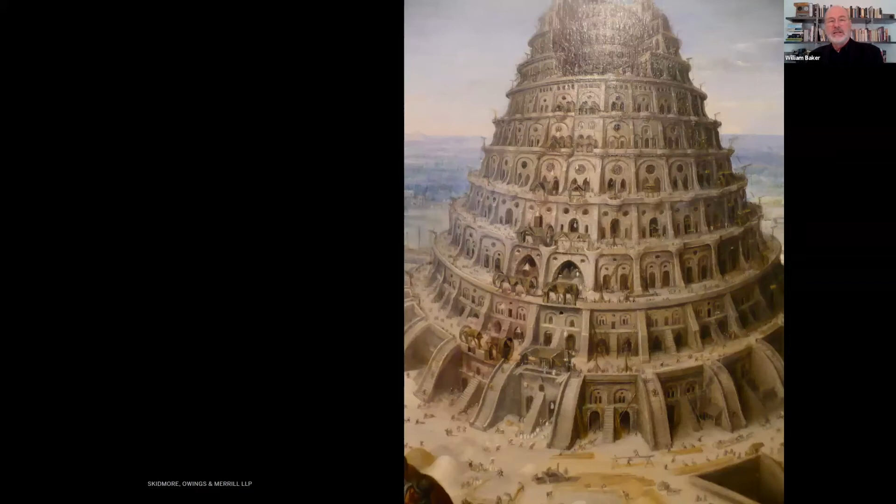Now, when you talk about tall buildings, they're definitely part of our culture. There's always been the desire to go high. If you're in the hills, you want to climb the mountain, you want to go see what's on top. It's part of our culture going back to the Tower of Babel. It's central to who we are.

We have this desire also not only to go high, but to stand over the abyss. These are glass boxes that hang off the edge of the Willis Tower, used to be called the Sears Tower, where you're a good 300 meters above the pavement.

And skyscrapers - there's some debate about what is the world's first skyscraper, but for the moment, let me use the Home Insurance Building as an example. What makes it a skyscraper? There's two fundamental things, and these also apply to the Burj Khalifa.

This was the first steel frame building - the structural system and the elevators, the vertical transportation, as you call them, the lifts. On the Home Insurance Building, it was a steel skeletal frame. And for the lifts, Elisha Otis developed the safety elevator where you could cut the cables and it made it safe enough that people were willing to have it as the primary means of getting up and down the building.

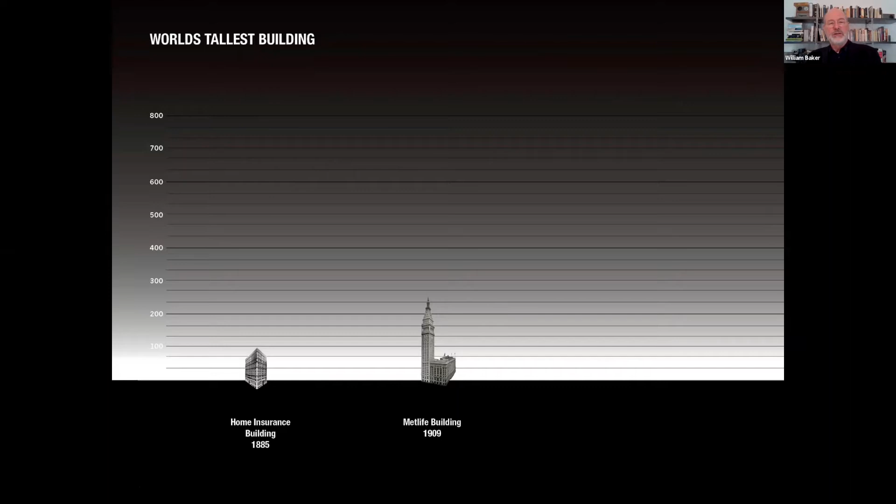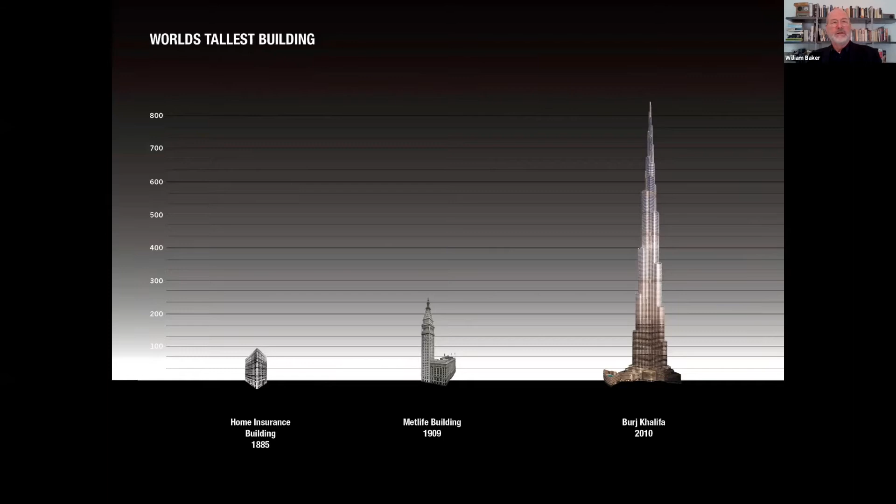I have to say that structure and vertical transportation are still the key components of tall buildings. And the change in tall buildings went fairly rapidly from the Home Insurance Building to the MetLife building in New York, and until we get to the Burj Khalifa, basically 100 years after the MetLife building. So there's been quite a run up in the height.

Though there was a bigger change from the late 19th century to about 100 years ago, the 1920s and 30s, principally in New York, there was a great run up in height, and then the increase in the height of the world's tallest building was somewhat incremental for quite a few years.

And there's all these debates about whether or not you count the thing on the top. Is it part of the architecture or is it an antenna? Depending on how the buildings are designed, sometimes they're counted, sometimes they're not. But you can see it was a fairly steady range for the world's tallest building until you get to the Burj Khalifa, where the change in height was more than a 60% increase.

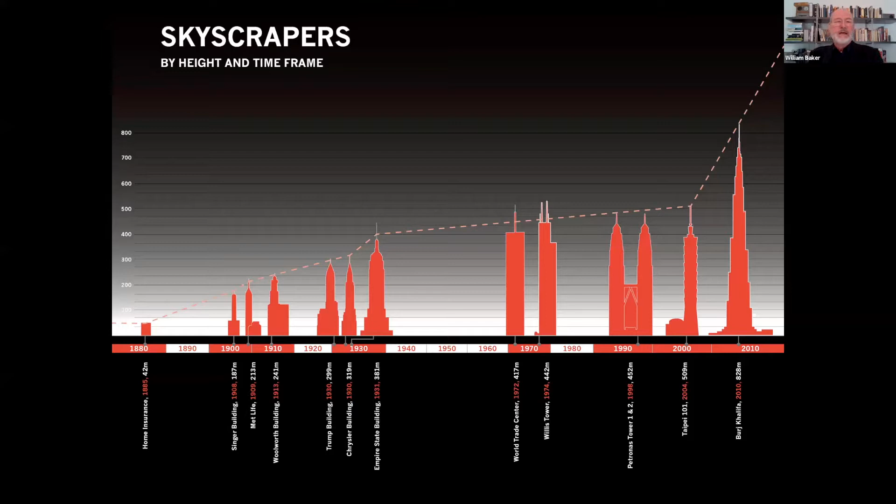And since it's a student presentation, I want to bring three technical issues to you. One is first a concept of a tall building - it's a giant beam coming out of the ground. Conceptually, this is very, very important.

Because if you think of it as thousands of elements, like these little columns and spandrel beams and floor beams, it's too complex. Our brains are not able to deal with that information, and you cannot do the design. So, quite frankly, I do most of my preliminary designs on paper with an HP calculator, a pencil and an eraser.

And you can design the world's tallest building with just those tools. In the end, you're going to put it in the computer to verify things and see if you missed something or get additional insights. But the fundamental concepts should be in your head.

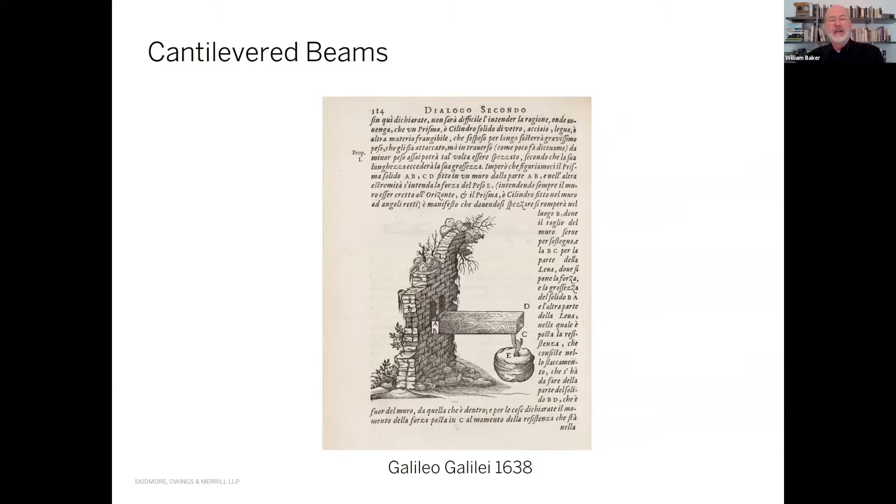And let's talk about beams. Let's go back to the first structural theorist, which is Galileo. I consider him the first modern structural theorist. In his dialogues of 1638, he talks about the cantilever beam, and he gets it not quite right - he didn't figure out the neutral axis, but he got enough that he got the concepts right. So here we have a cantilever beam coming out of this remnant of a masonry wall.

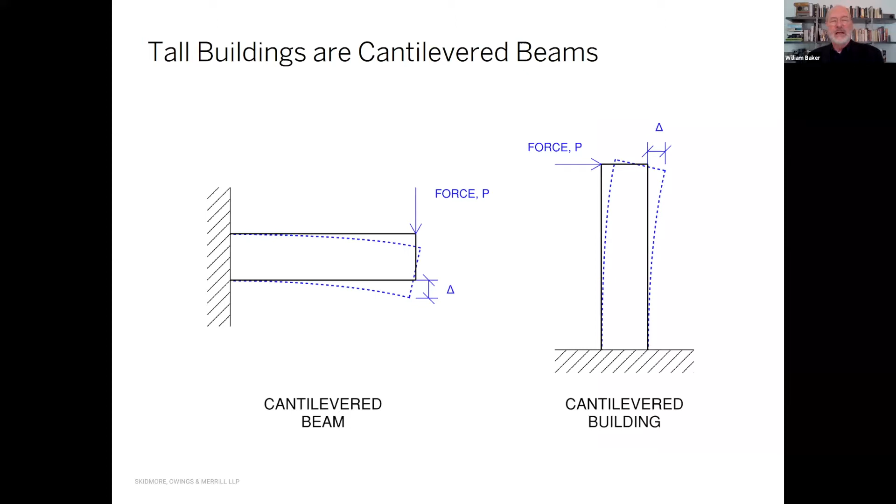So let's take that idea to a tall building. Let's take a cantilever beam and turn it vertically. And just like on a cantilever beam, you push on it, it deflects. On a tall building, you push on it laterally, it deflects. And when we think of these tall buildings, we think of them very much in the context of a beam.

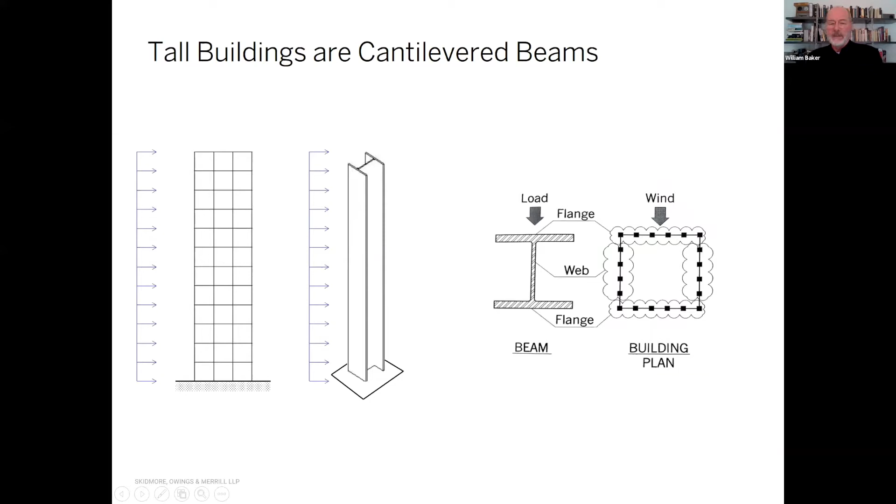In a beam, you'll have the flanges, which take the overturning moment. You'll have the webs that connect the flanges and handle the shear. In an I-beam, it looks like something we're very used to seeing. In a building, it might look like an I-beam, or it might look like a box or the like. And when I think about it, if I go back in our archives, when Dr...

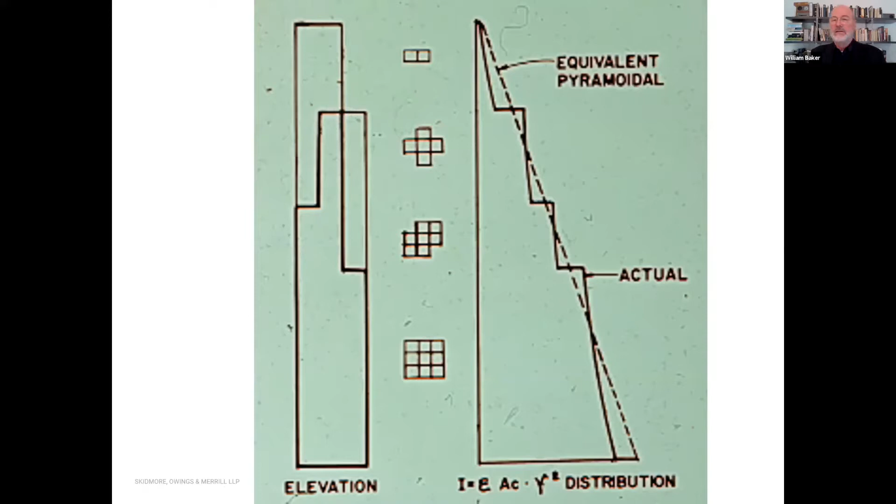Fazlur Khan and Hal Iyengar, who used to be my bosses at Skidmore, were working on the design of the Sears Tower. I found this in our archive: a picture of the building, an elevation, the plan view, and a plot of the moment of inertia of the entire building. It's a step function, but they approximate it with this linear approximation. You can get pretty close to the actual behavior of the Sears Tower just by using the simple principle of calculating the moment of inertia.

If you go down to the bottom of the Sears Tower, or the Willis Tower, Faz Khan and Hal Iyengar called it the bundled tube. For me, it's actually a big box beam with four webs.

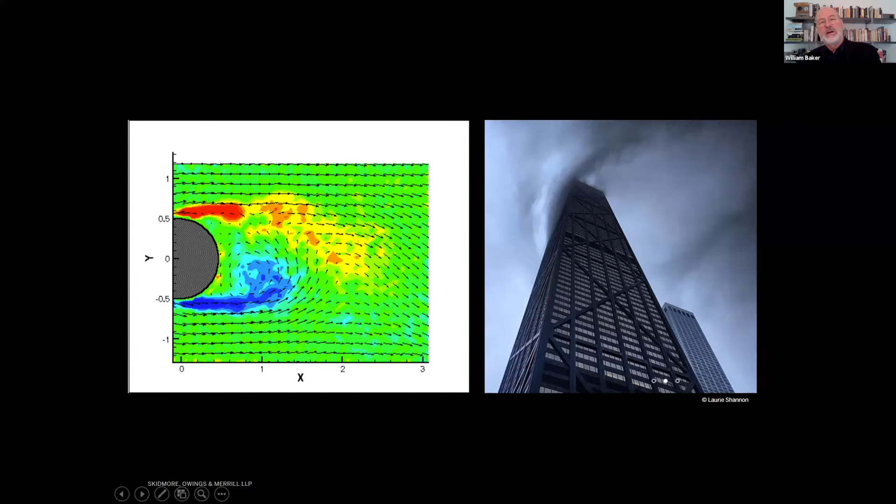As these vortices appear, they cause a pressure differential across the tower, which causes it to move from side to side. This happens in a very rhythmic pulse, just like a child on a swing — the child moves higher and higher because they're matching the natural resonant frequency of the swing. This is the tall building problem.

The third issue I want you to think about, when I talk about tall buildings — primarily the Burj Khalifa — is issues of scale. This is very, very important, and it was actually recognized by Galileo in his dialogues.

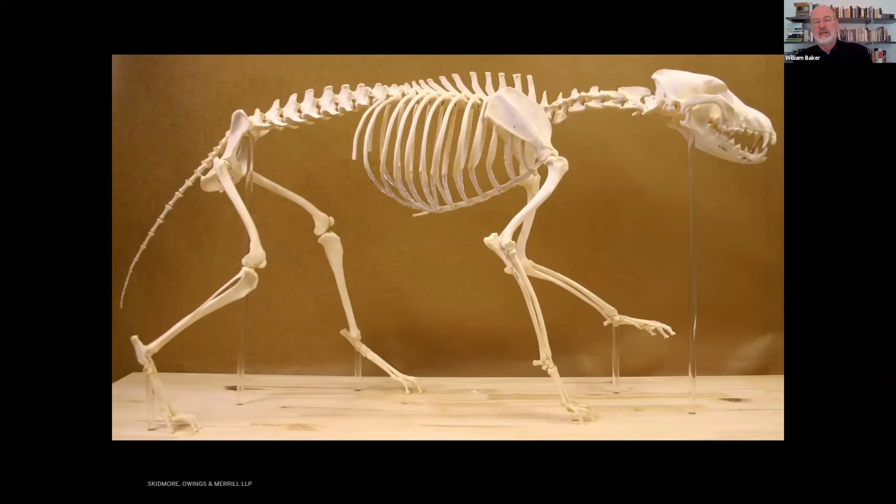Now, Galileo's rules weren't quite accurate for bone structure, because it's not just a bending issue, it's also axial. But certainly, if you look at the scale of a small mammal to a large mammal, you see changes in proportions, and at some point you just can't make it any bigger.

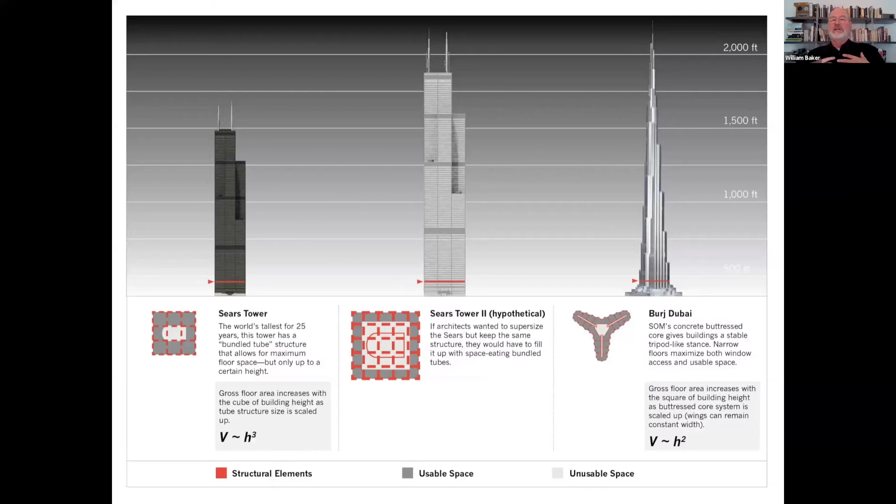Issues of scale don't apply equally to all structures. If I were twice as tall, twice as wide, and twice as thick, how much would I weigh? Eight times as much. So things go bad fast.

So if I were to take the Sears Tower, the Willis Tower, and scale it up to be as tall as the Burj Khalifa, it would be too big. You'd be too far from the windows, too much floor area. You just don't take this and scale it up.

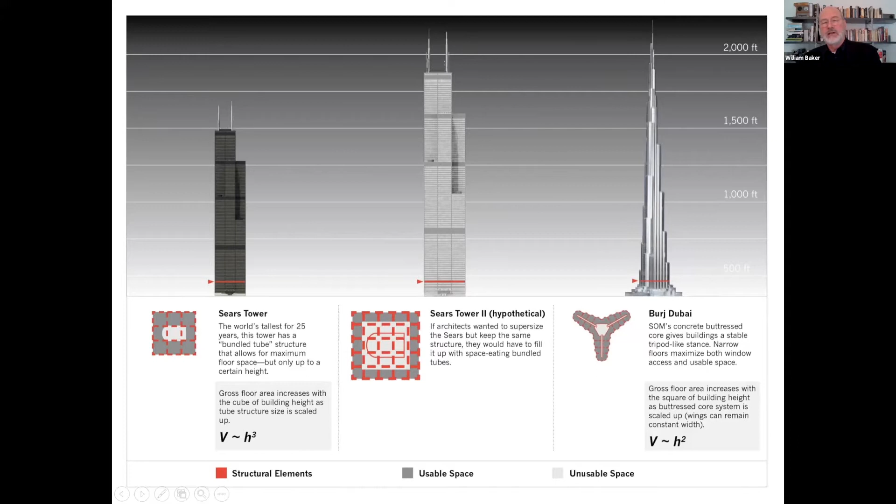Whereas the Burj Khalifa scales by the square rather than the cube. And it's through this understanding of scale that I think we were successful in our design. Because if I were to make the Burj Khalifa twice as tall, I'd have twice as many levels, and I would have to make the legs longer, let's say twice as long, but I do not have to make the legs any wider. Because of that, it scales by the square rather than the cube. This was an essential component of the success of the Burj Khalifa.

In these species, in these creatures, one of the things I think is important to achieve as architects and engineers is that the architecture and engineering is so integrated that, say, you pull the skin off the building, the architecture does not go away. They're the same. You cannot describe the structure without describing the architecture, and you cannot describe the architecture without describing the structure.

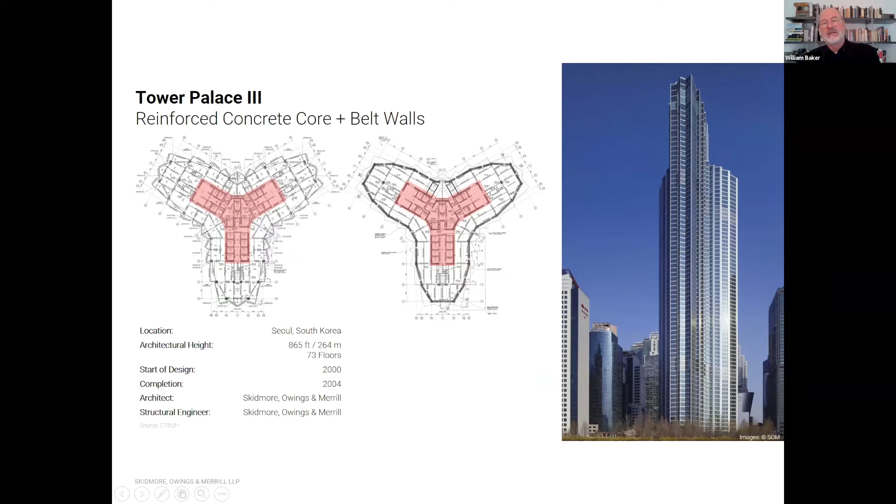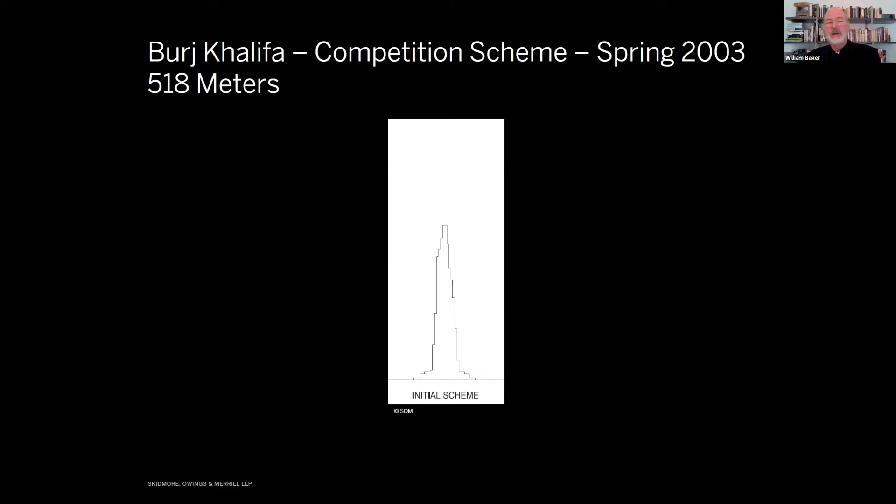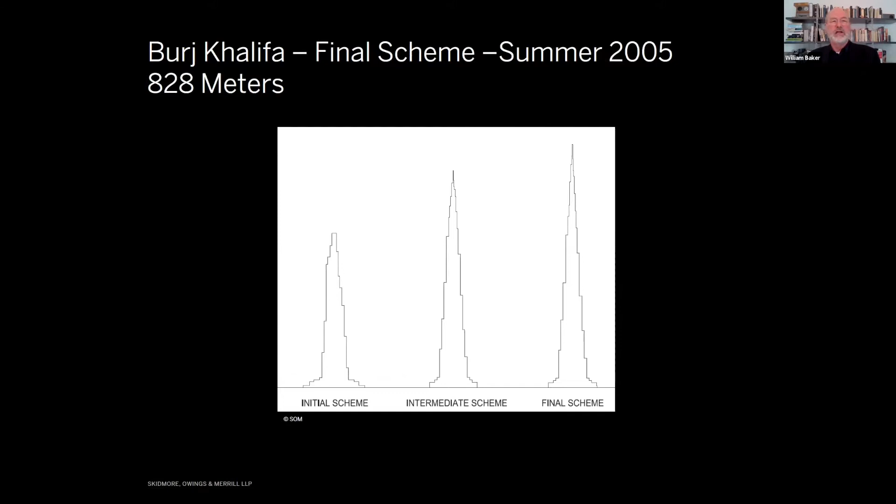So this is what we won the competition with in spring 2003. We started out with a brief to have the world's tallest building. At the time, the world's tallest building was the Taipei 101, so we were just 10 meters taller than Taipei 101, which would have made it the world's tallest building. But it quickly grew to 725 meters, and then, after it was already in construction, it grew to 828 meters. I'll talk a little bit about how we were able to achieve that.

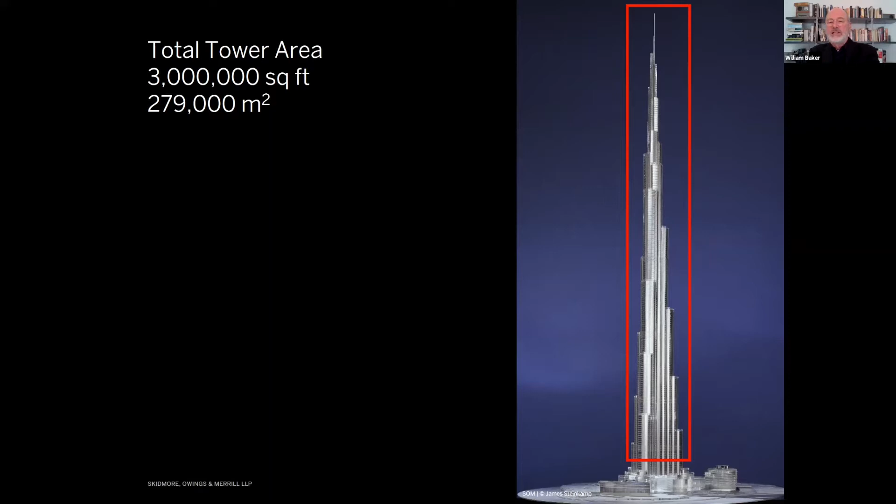And that's important. That's actually a good thing because that makes it more easy to market. The investment is more controlled as far as cost, and I think that's one of the reasons the building was actually built. Down at the base, there's a lot of other things going on, so parking and the like. This is not including the mall or the other stuff, this is just at the base of the tower. And so the total project is on the order of 465,000 square meters.

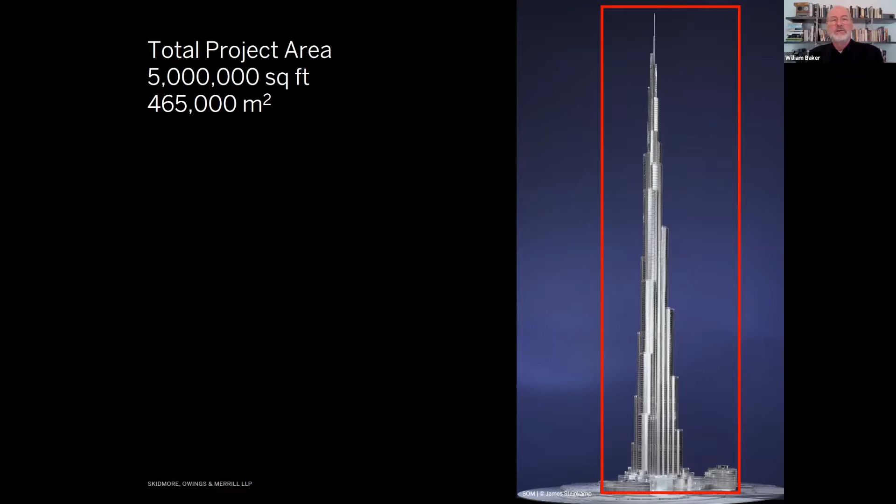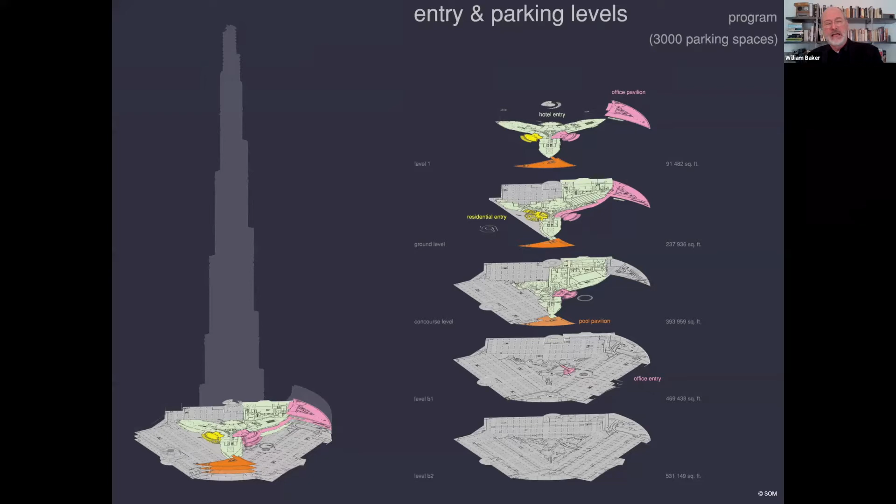I'll walk you through the building, I'm sure you know it pretty well. At the base, we have these fairly large floor plates to handle parking and other things. And then we get into the Armani Hotel, and then above the Armani Hotel.

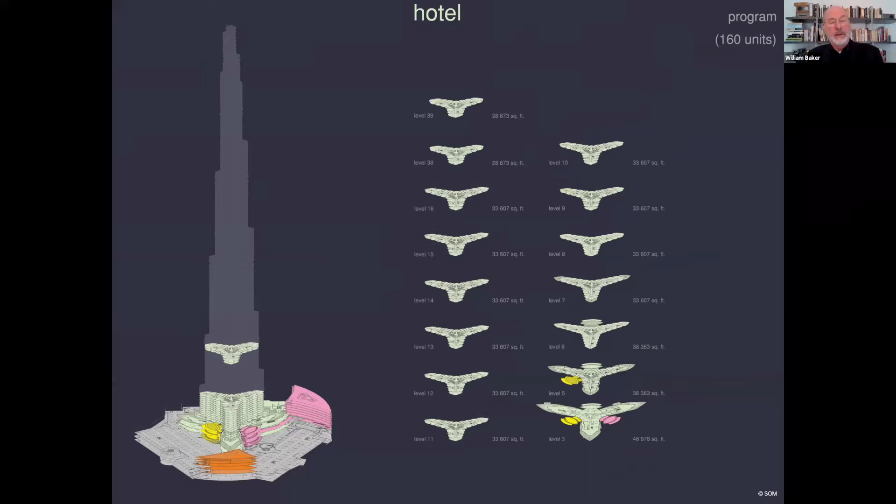By the way, let me give you a little look at the floor plate. The floor plate is this Y-shaped building, and what's remarkable is the views are great. If you go to the World Trade Center towers that went down, the columns were every meter, and the windows were only half a meter wide, so it was like you were in a cage. On the Sears Tower, the windows are like 3 meters wide, and the columns are about 1.5 meters wide, so you're about 2/3 window and 1/3 opaque. Here, these columns are on the order of 600 to 700 millimeters thick, and the spacing is 9 meters, so you have tremendous views.

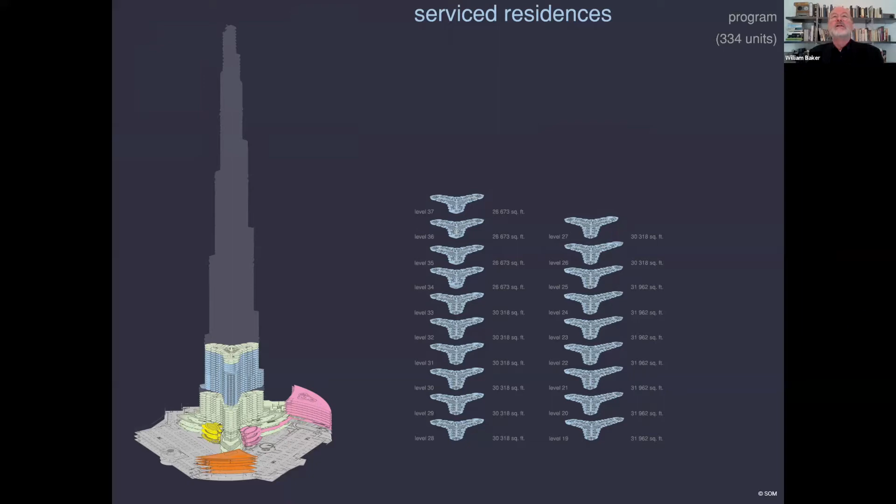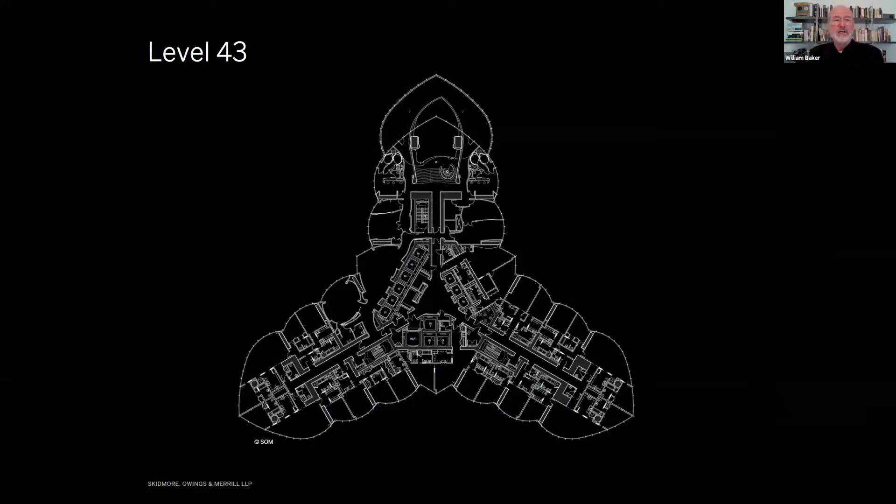And as you're there and you're looking out, it's not like you're in. You may be in the world's tallest building, but your views are not obstructed. Above the Armani Hotel, we have the service residential, and then we have the more residential. The floor plates are changing as we go up, as they get smaller. The wings step in one at a time: A wing, B wing, C wing, in a clockwise manner. And then above there we have the luxury residential.

Now Emaar, they were able to sell—this is just totally amazing—the yellow, the brown, and the blue in 2 nights in 2004. And everybody who bought a unit had to put up 50% of the purchase price within 6 months, and so that went a great deal towards financing the tower.

One of the interesting things is, when you're in a pure office building, your financial model is quite different, because you have to build the entire building, get some tenants, and then wait for your rent check. Whereas here, with the purchasers, your cash flow situation is much different, and that's fairly important.

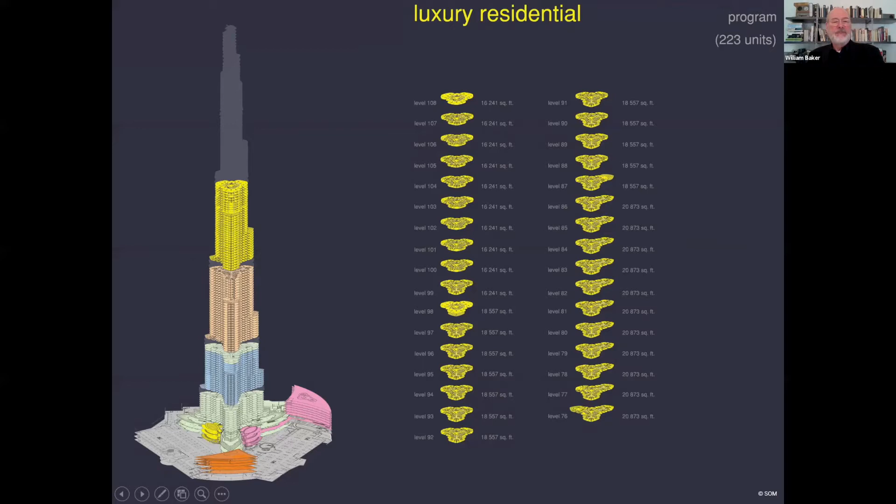So the floor plates continue to get smaller, and then at the very top we have these corporate suites, which of course recently a lot of them have been converted into additional observation decks, including the chairman's suite. At first these were supposed to be purely residential palaces in the sky, but fairly late in the game, Mohamed Alabbar decided that he could do better if these were boutique offices, since, as you guys know, Dubai is the financial center of that whole region. So everybody in the region has an office in Dubai to do business, and if you're very prestigious, you can have your offices in the Burj Khalifa.

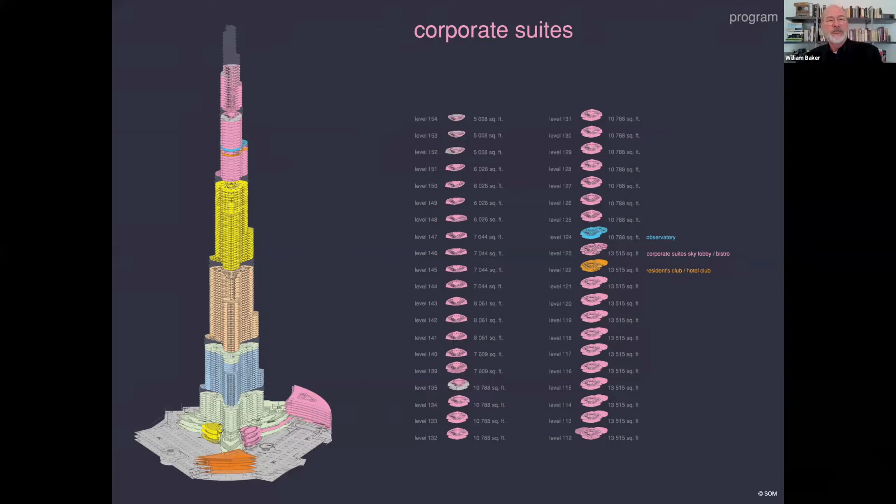Anyway, so the floor plates are getting a bit small, and then you have to have these mechanical systems floors. You cannot service all your mechanical and electrical functions from the base. The water pressures would be enormous if you had one pipe that went from the top to the bottom with water pressure. And the other thing, your transformers, you cannot take low voltage that high without too much loss. So what we do is we divide the building, from a mechanical, electrical, and plumbing point of view, into a series of shorter buildings, say 30 to 40 stories.

And this is very common in tall buildings. That's where you get your air to bring in for your services. You have your transformers, you have your pumps and the like. So you're able to use normal pressures, normal voltage drops within these zones.

Another interesting thing, in the summertime, is to be down at the base of the tower and then go up to one of the high terraces and feel the climate change. I remember during construction, we used to go up on the outside of the building in the man hoist. I remember going up in July, and you know how it is in Dubai in July, it's pretty hot, pretty humid. By the time we got up to about the 50th floor, you start to notice the climate change. By the time you got up to 160, it was pleasant.

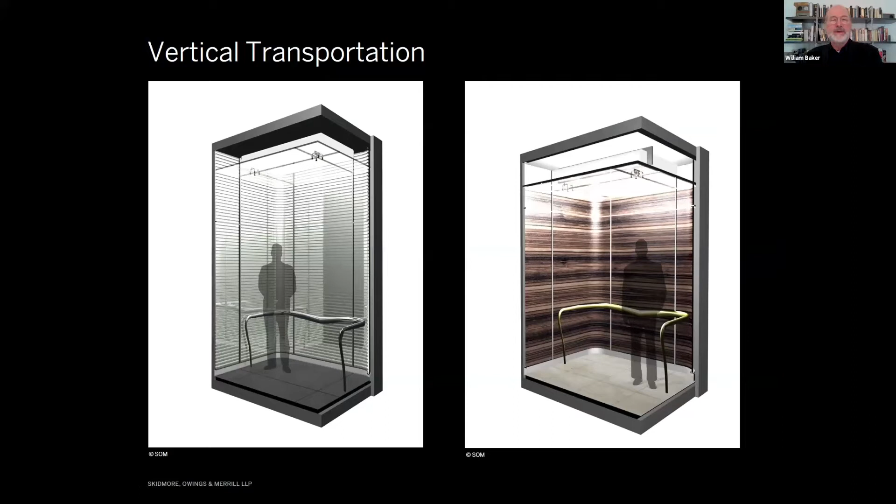As I said, structure and vertical transportation are key aspects. So I'll give you a little map of the vertical transportation. You have a series of zones. For the bottom zone, it's like a normal building where you go in and take a lift to your individual floor. For these upper zones, what you do is kind of take an express elevator, we call it an express lift.

It's like taking an express train from one major city to another major city, and then you get in the local train to take you to your village. So that's how it works. You have these express lifts that take you to a sky lobby, and then you get in your local, and it goes very fast.

It was interesting for the top zone. We actually go up to the middle of the zone, and then you get in your locals. They either take you down or they take you up.

Now, at the time when we did the Burj Dubai, as it was called then, Burj Khalifa, the highest you could ever go on a lift was 0.5 kilometer. That's what we did here. This gray bar is the freight elevator, the service lift, and it goes up 0.5 kilometer. Then you have to change into a local to get to the very top. Nowadays, they've come up with new technology using carbon fiber cables instead of steel cables, so they can actually go 1 kilometer or more.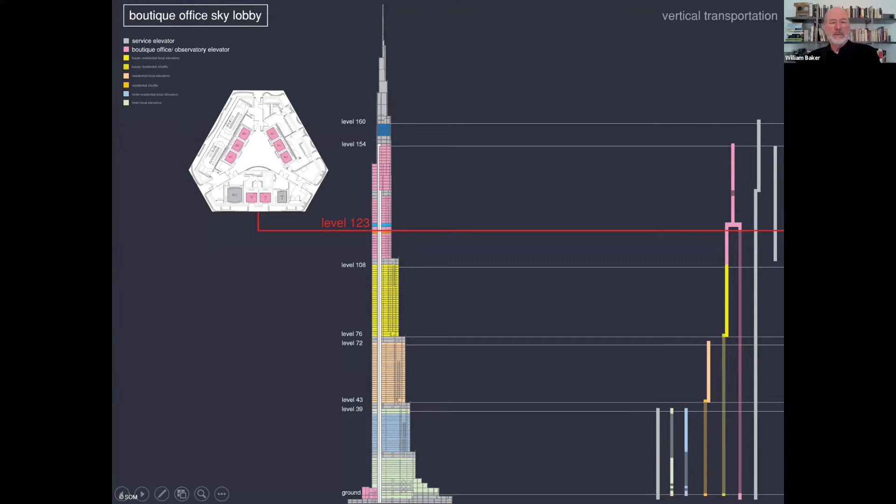Certainly the fire-related safety is very important. If people go down the stairs, they can do it in these protected stairwells. There are multiple stairwells. I've never climbed all the way up, but I've climbed down. I remember when it was under construction, I had one of the engineers give me a little chart of all the link beams with the highest stress.

So I was looking for cracks. At the time, there hadn't been any big windstorms, so I couldn't find any cracks. But I walked down. It took me a while, but it wasn't too bad. My calves hurt the next day, but coming down, it's not too bad.

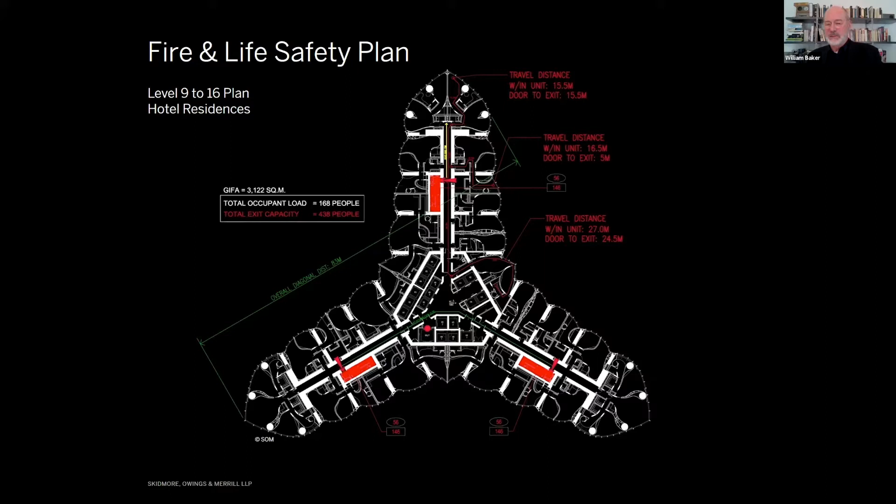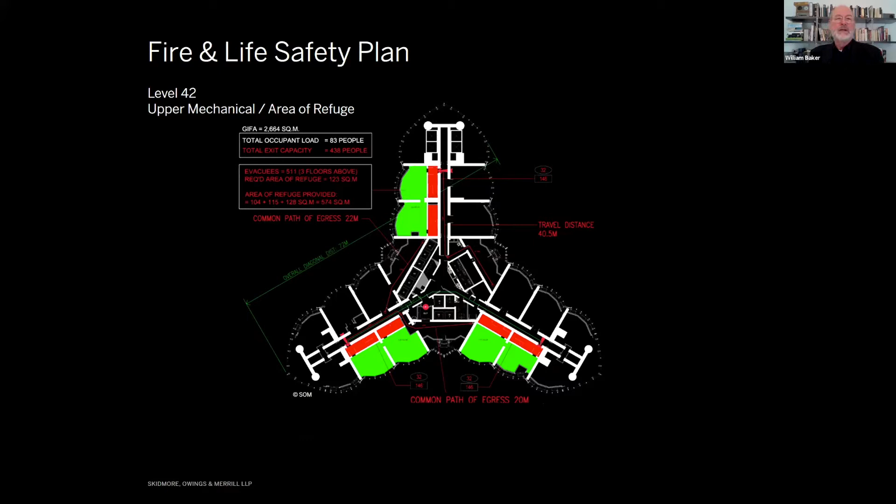But we don't expect people to come all the way down. We have areas of refuge several times down the tower where someone could get out of the stairwell, take a rest, and then continue their trip down. We also have something called lifeboat elevators, so with the permission of the fire marshal, some of the elevators can take you down even if the building has an emergency event going on.

So what made this possible? Number one, good luck. The right place at the right time with the right client. But let me keep it to the technical side. So what made this possible? Structural systems, wind engineering, the integration of systems, and construction technology.

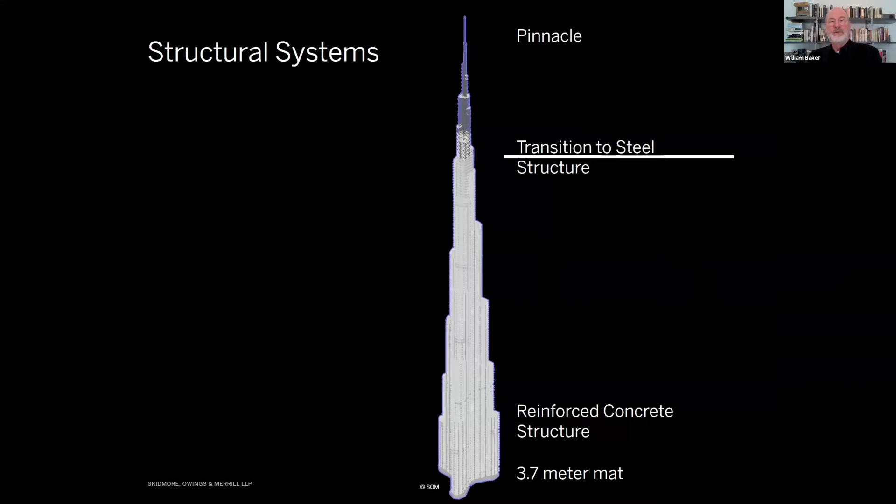As you probably well know, it's primarily a reinforced concrete building, transitioning to steel at the top for the spire. It's composed of simple systems: walls, slabs, and a few columns. And if I were doing it again, I wouldn't even have the columns. I'd just have walls and slabs.

This is the structural system. As designers, as you go into work, you need to be in control of the design. If your boss asks you how the structural system works, and you have to go query the computer, you're not in control. You need to be telling the computer how the system works, and you need to be driving the design.

And if someone asks you to describe your design and it takes lots of words, maybe you're not there yet. What you need to do is distill your ideas down to their essence. And Fazlur Khan did this, I don't know if intentionally or just innately. The John Hancock is a braced tube, two words, noun and adjective. The Sears Tower is a bundled tube, two words, noun and adjective.

You don't want to do this too early, because you don't know where you're going when you start design. Design is very nonlinear. But at a certain point, when you think you're close, you think you're there, try to describe what you've done in words. And if it takes a lot of words, you're probably not done. If you get it to a few words, that's good, like maybe a sentence. Sometimes you can get to two words.

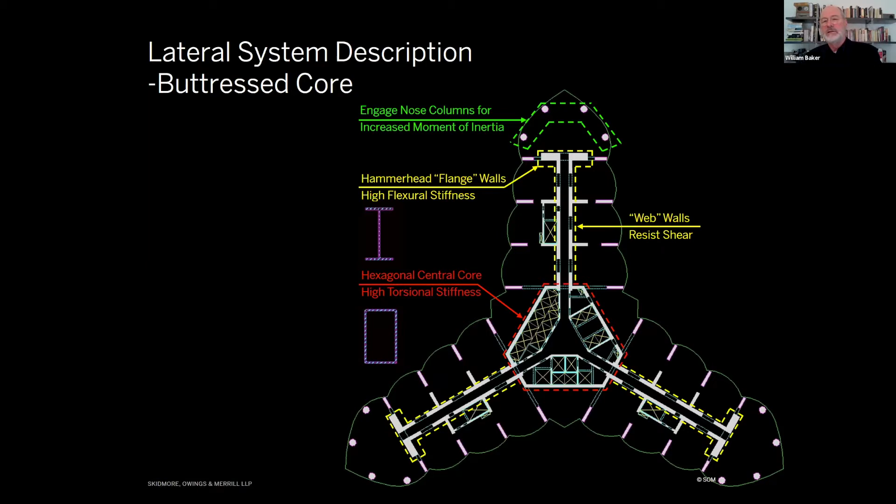Anyway, so what we do is we buttress it by these parts like an I-beam going down the three wings. Just like an I-beam has a web and flanges, this has a web and cross flanges in the three directions. If wind pressure blows against two of these wings, the third wing will be the buttress to resist those forces. And this acts like a giant beam. We actually calculated the radius of gyration of the entire building as part of the design process.

Now, one of the most important things you need to do in a tall building is manage gravity. Gravity is very reliable, you can count on it. You don't worry about the inspector not being there that day or anything like that. The gravity will be there, but you need to put the gravity where you want it. So what we did a lot is push the gravity from the core to the perimeter, outward, and in the process we had to push that gravity across these link beams in order to get it out there.

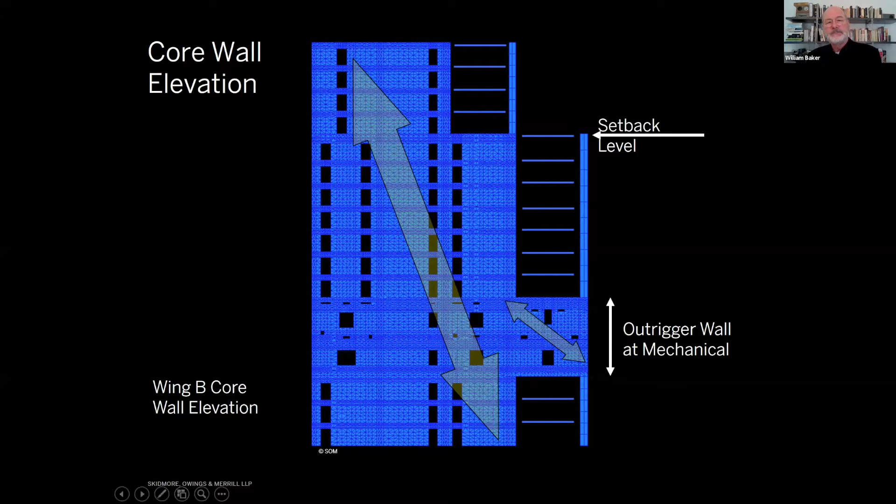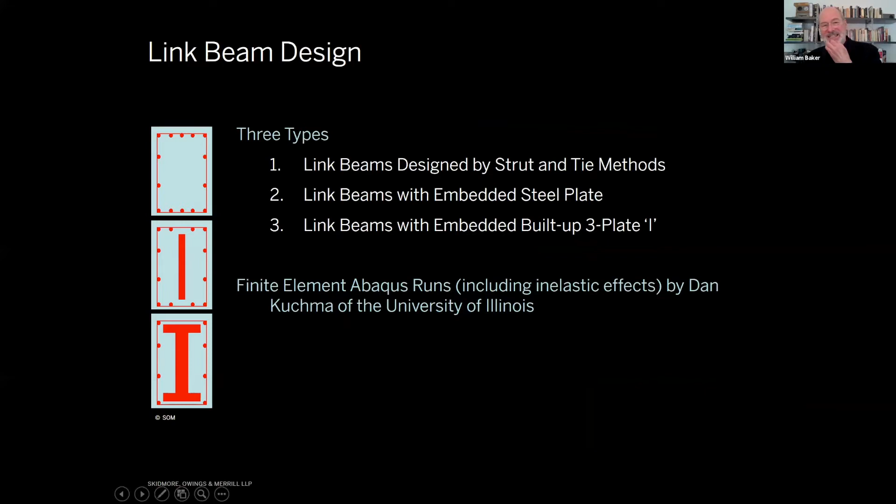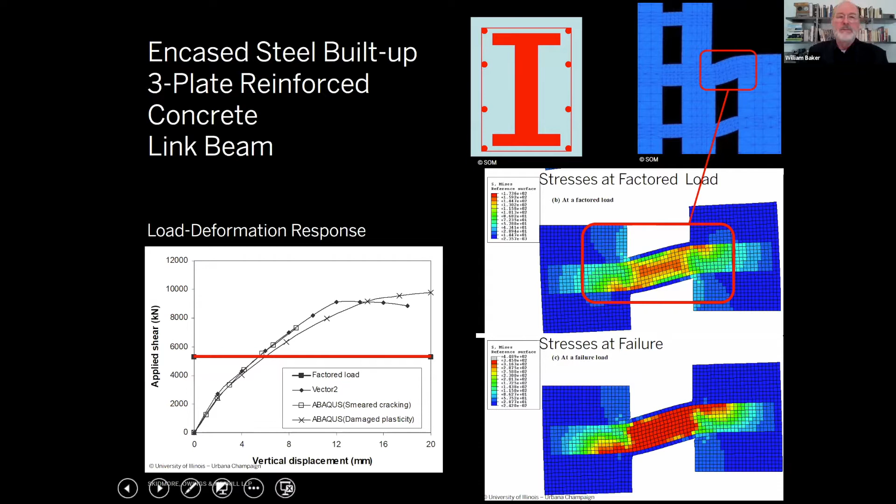But the Burj Khalifa has no tension, even in a storm that happens once every 1,700 years. That's because we manage both the wind and the gravity. We use this amazing material, which we call reinforced concrete. We should probably come up with a new name.

At the time, Dubai had really good concrete compared to many places in the world, partly because of the corrosive soils there. So the way to beat that was to have high quality concrete, and we designed for the highest strength concrete available at the time, like a C80. Though the supplier generally delivered at least C100, very high modulus, really good stuff. It's not like the stuff that's down on the sidewalks, for sure.

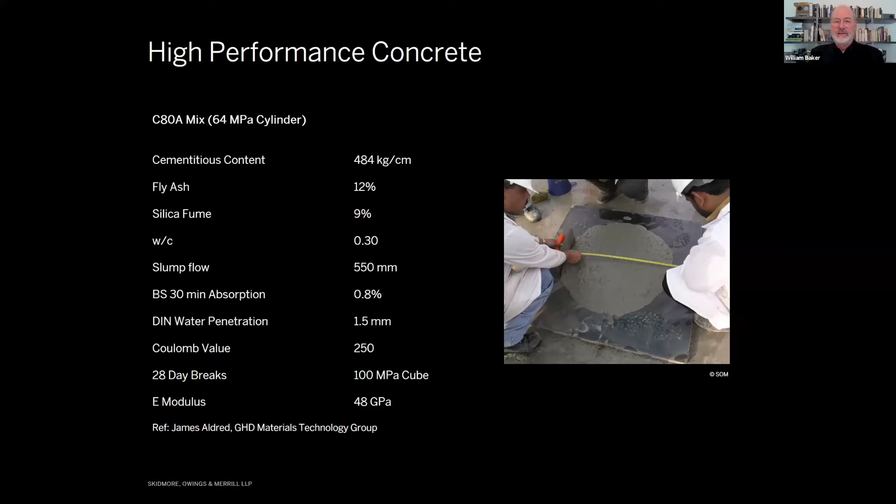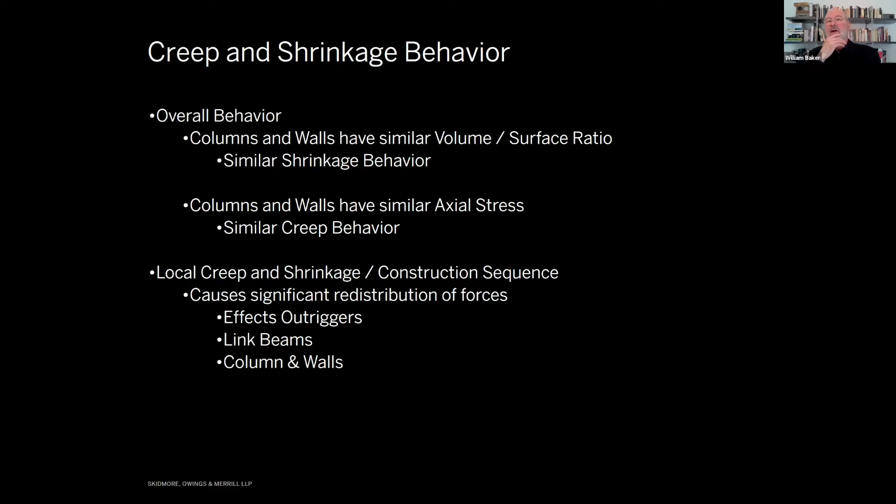At the very top, we had the steel spire where this triangular system sat on the hexagonal core. At the very bottom, we have this foundation system of piles. You'll notice most of the piles are outboard, not in the middle.

These piles are 1.5 meters wide, about 48 meters deep, and there are around 194 piles — I have to count them again. Settlements are very small, about 50 millimeters, only that much — the width of two thumbs. That's how much the building settled.

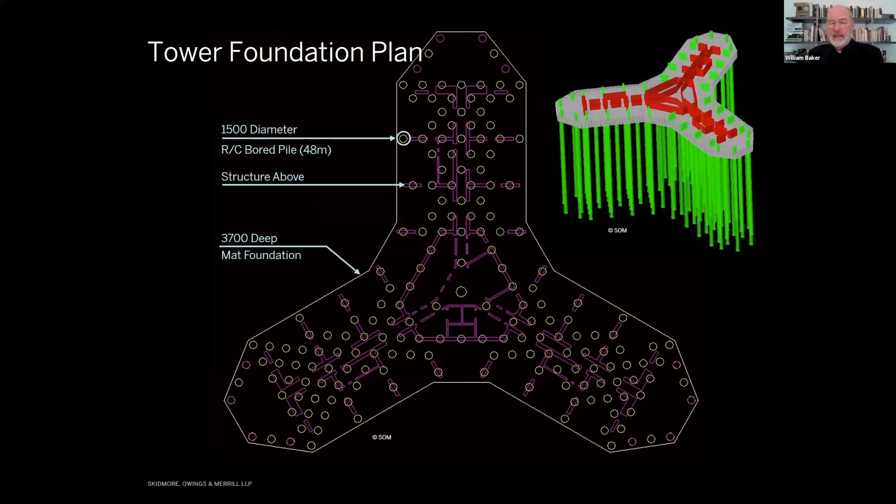We're sitting on a sedimentary rock called calcisiltite, which, in my mind, is like sandstone, but instead of sand, it's silt — seashell silt, a calcium silt. It's pretty good material. Occasionally you'll have a gypsiferous void zone, but we didn't have that problem — where you might have some voids, there were none.

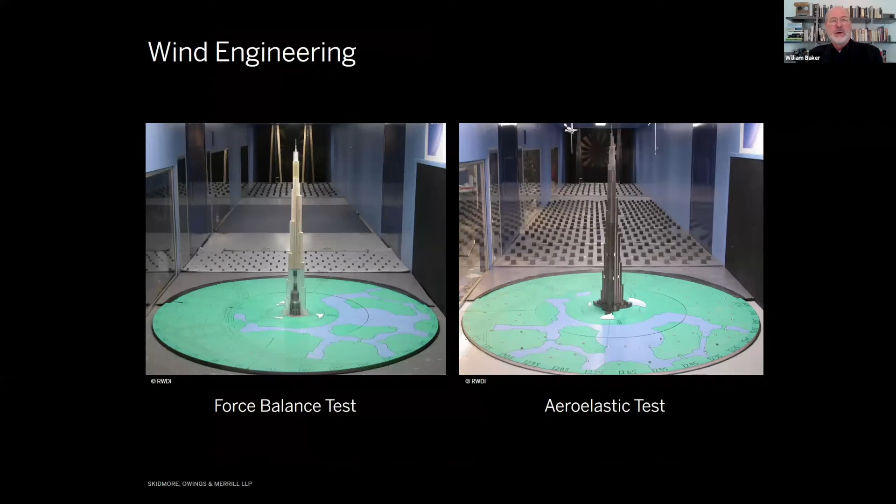Let's go back to the wind engineering we talked about before, the harmonic resonance. We did a tremendous amount of wind tunnel studies — the minute we won the competition, we went into the wind tunnel. We had to figure out what the wind climate was in Dubai. There wasn't as much data then as there is today.

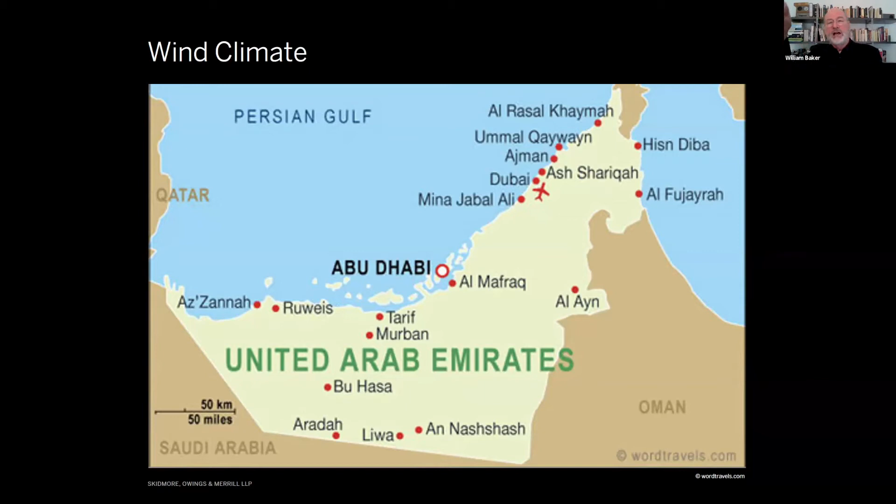Working with RWDI, they made what we call a superstation, taking wind data from several airports in the region to create a pseudo superstation. Then they did very sophisticated studies to figure out the velocity profile as you get higher and higher. We did a whole series of wind tunnel studies with various configurations and structural systems.

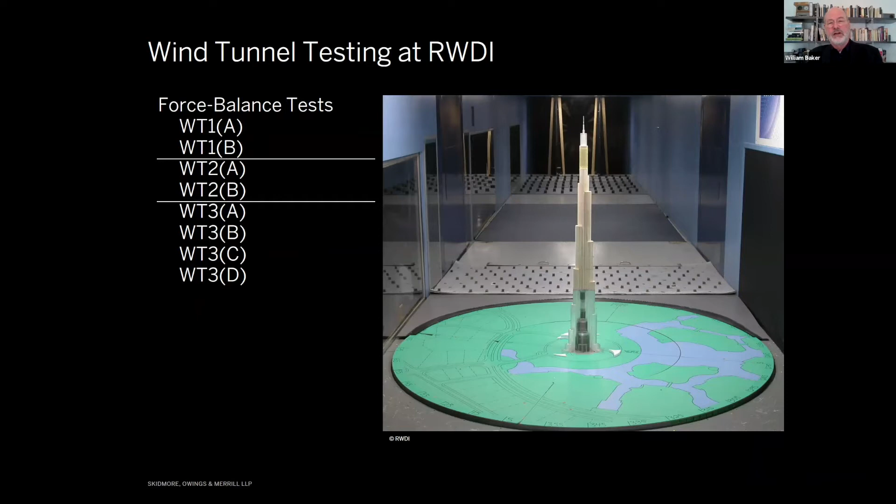What we found is the building has 6 principal directions. When the wind blows into the nose, it's pretty benign — the nose acts like a cutwater, and the vortex forms downstream, so it doesn't really push against the building. But when the wind blows between 2 of the wings, what we call the tail direction, a vortex forms and blows against the 3rd wing. That was of some concern.

So what did we do? We reshaped it. Actually, the first shape we tested in the wind tunnel did not work — it had very big forces and very big motions. As in The Hitchhiker's Guide to the Galaxy, the guide says in bold letters, don't panic. So as engineers, when you have a problem, don't panic — it won't help you. Work the problem like an engineer. Figure out what the problem is, work it, and try to keep calm.

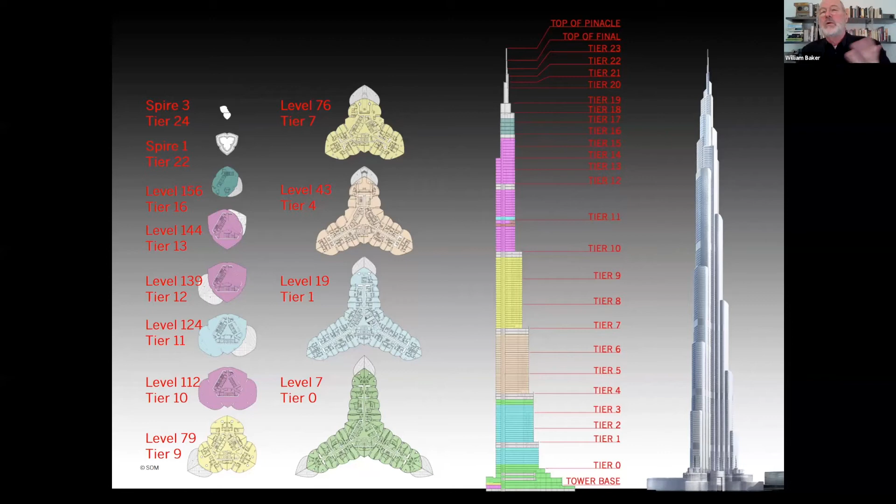So we reshaped the building. Every time you change the shape, the rate of the vortices changes. Remember that child on the swing with two feet kicking in harmonics? The Burj Khalifa essentially has 27 feet, and they're all kicking at different rates, so the swing doesn't go anywhere — the harmonic action is barely activated.

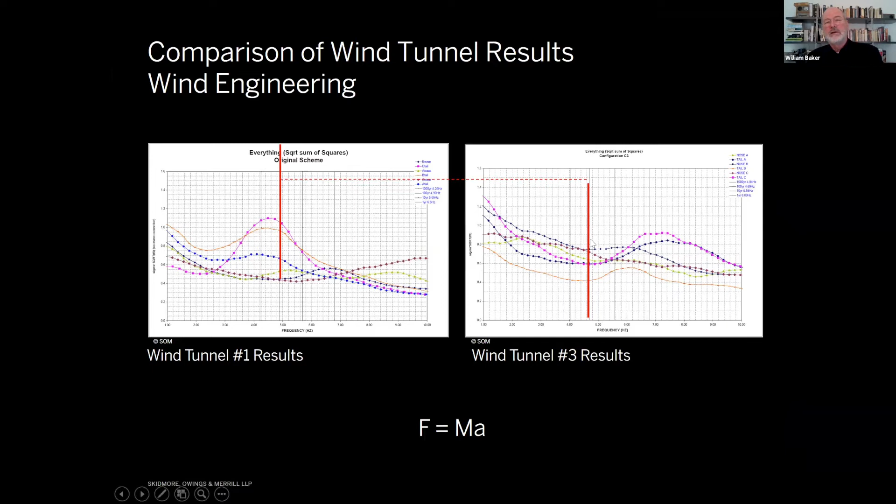This red line represents a 100-year storm. Our first shape was tested across these 6 directions. By the time we had reshaped it twice, from wind tunnel study 1 to wind tunnel study 3, the forces had dropped — my little bar moved from here down to there. And all of a sudden, we could go much higher.

So here are some of the wind tunnel models. We have both aero-elastic and what we call force balance models. This is the first model, this is an intermediate, and this is the one we built. We actually tested one that was taller, which did pretty well, but it was too late to accommodate it.

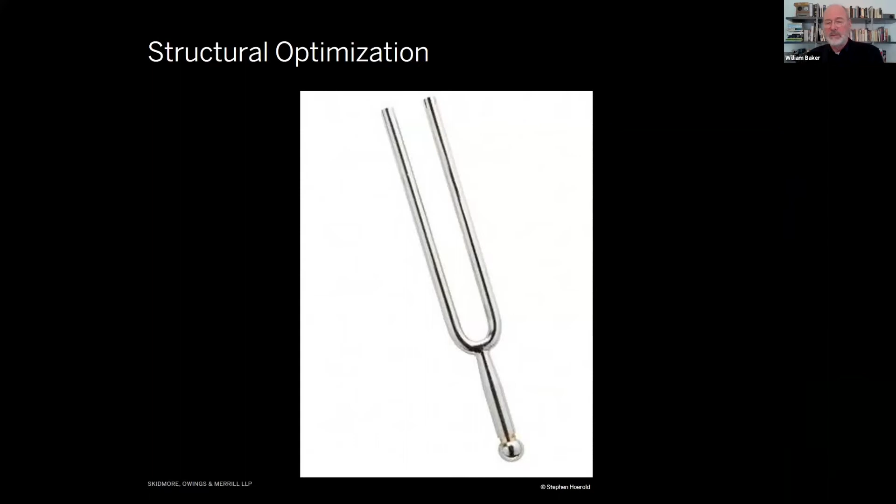We then tuned the building, tuning the harmonics of the building like a musical instrument. We play with the mode shapes, which directions it shakes, what's the fundamental mode shape, what's the period, and what's the shape of the mode shapes.

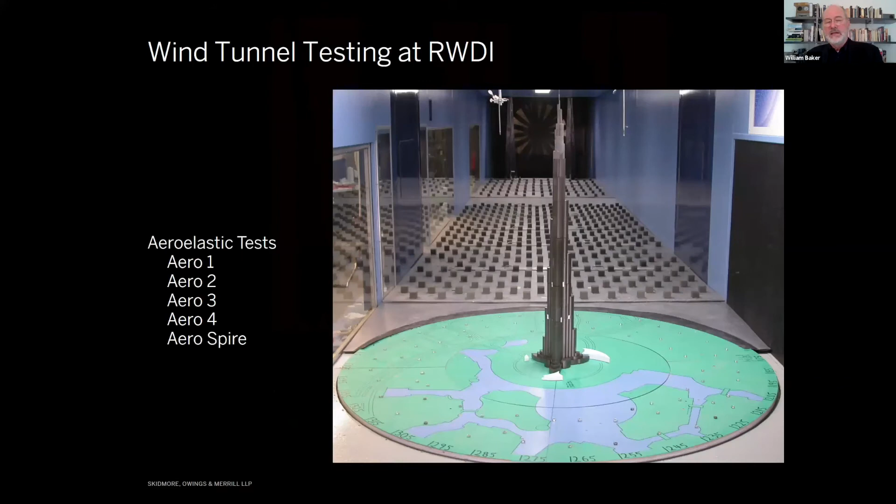And we had very, very good dynamic behavior. Then the aero-elastic models, which actually model the actual structural harmonics, with this milled bar, and here's what we found.

So here is the one right after the competition. Base moment, let's consolidate that force. Acceleration, how much movement is done. By the time we finished the building, even though it grew by 310 meters, the change in height is essentially equal to the height of the Eiffel Tower. The base forces were less, and the motions were less.

What's really strange is this other one, which we didn't build, was actually even better, but there was a hot spot around the 40th floor, and we'd already gone past that point in design, so we weren't able to avail ourselves of this.

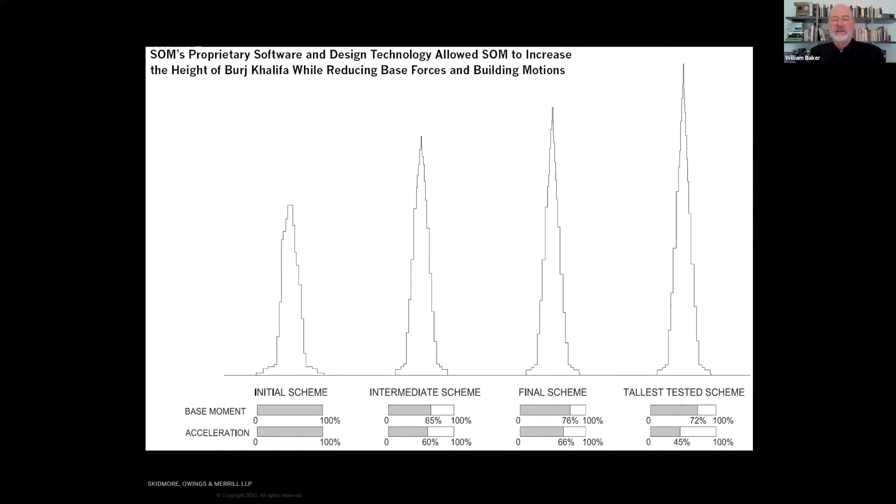One of the things that came out, as engineers you'll get exposed to scaling and similitude. As you go from the wind tunnel to the tall building, you can scale everything but the air. You can scale the geometry, the harmonics, but you cannot scale the air. But if you're in a turbulent range, it shouldn't make any difference. So these are the wind speeds, the model wind speeds, as we changed them in meters per second, it went down, then suddenly stabilized, which indicated we might have an issue with what we call Reynolds number.

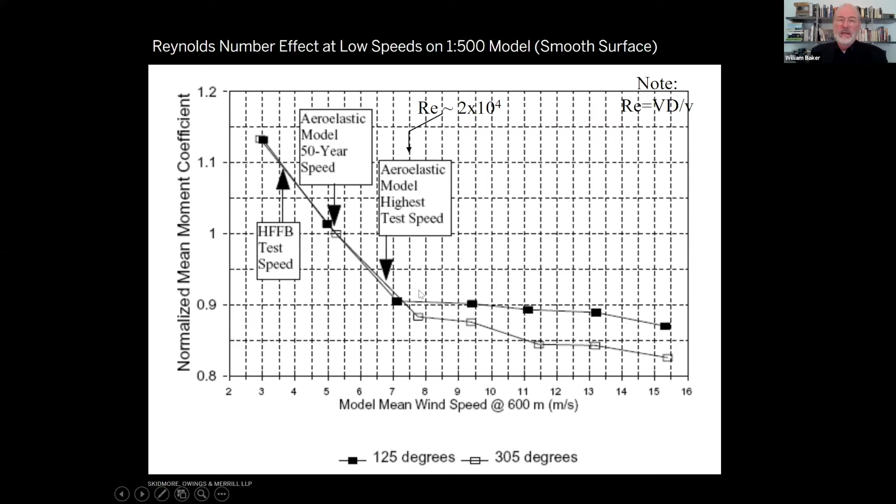So we did this model up in Canada at the National Wind Tunnel in Ottawa. It's a pretty big model, a 9-meter high wind tunnel, and we did this test just to see if we had a Reynolds number problem.

These buildings are Swiss watches. Everything matters. So this is the core. This is what we have: the most shafts, with 54 lifts, but the most openings for lifts we ever have is 19, because there are double deckers and sky lobbies and stuff. Everything has to be precisely oriented.

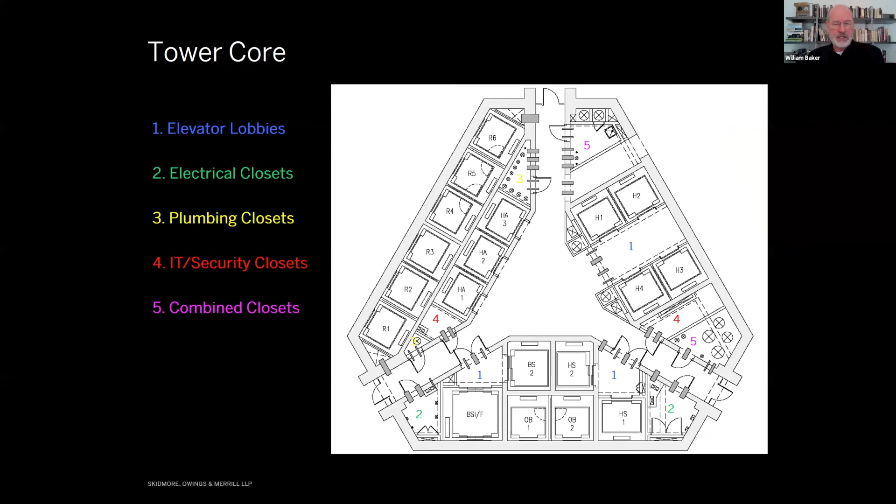So the architects and engineers go back and forth. It took us weeks or months to get this right, with the architects and engineers proposing and counter-proposing how to lay out the core. You have all these pipes that have to get through the structure, so you have to provide holes for them.

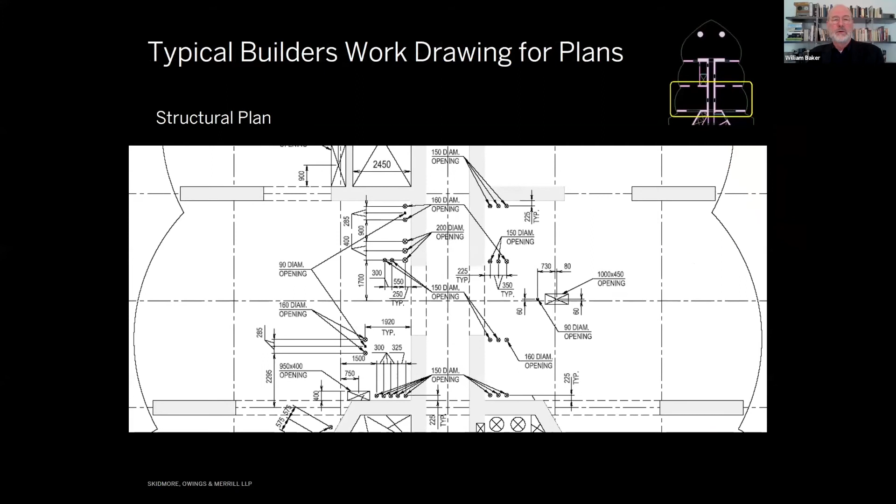So if you want to design a tall building: number one, have a clear structural idea. Do not try to make a bad idea work. You've got to have a rational system. You've got to think about proportions and scale. We owe it to our society to be efficient in the use of our materials. You've got to manage wind and gravity. And perhaps most important in really tall buildings, it's got to be simple and fast to construct.

You've got to have at least one idea how to build it. My boss, Hal Iyengar, used to always say, don't propose a design unless you have at least one idea how to build it. It doesn't mean you have to be a construction expert, but you can talk to some of your buddies who go into construction management and say, I've got this idea, how am I going to build it? Buy them a cup of coffee and maybe they'll help you out.

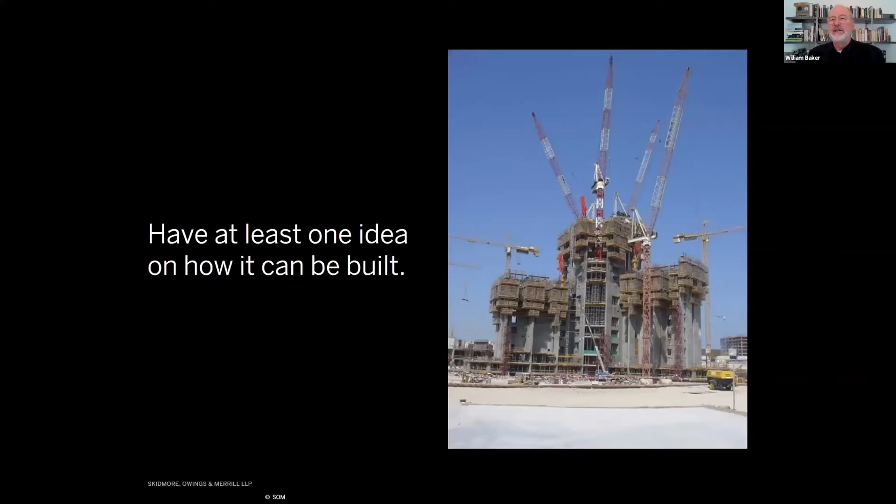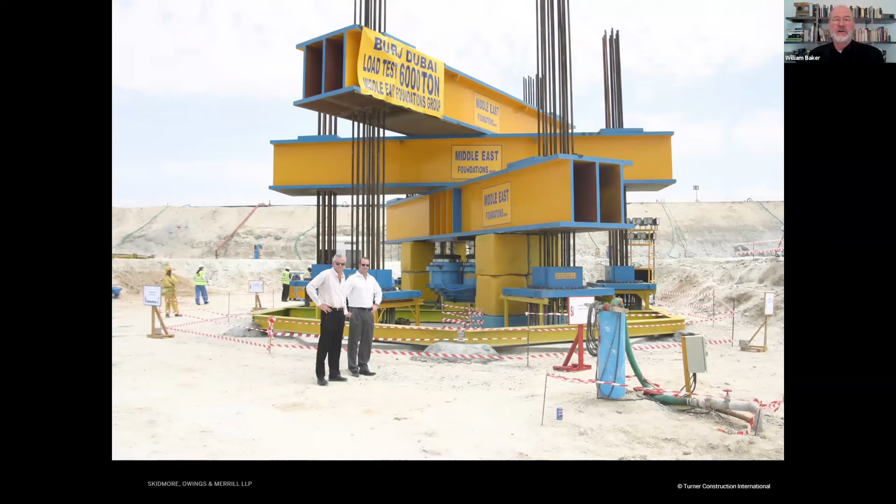In Dubai, you have very, very corrosive groundwater, so we did cathodic protection on the foundations.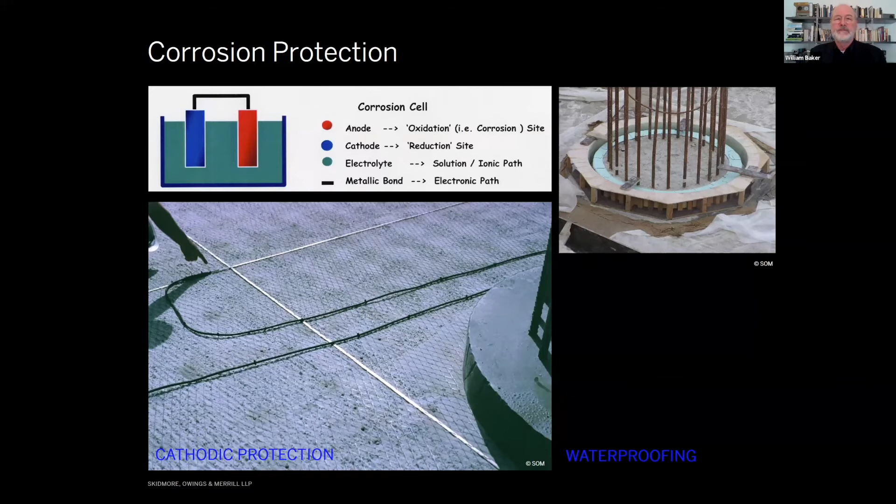We did our test cubes here, 3.7 meter test cubes, for the foundations. We were looking out for heat of hydration issues. You do not want to have your concrete cure so quickly that you change the chemistry. If you start to boil these things because of the heat, you got problems. So you have to have a mix that works, and of course, no matter what, they always end up doing these massive pours in the middle of the summer.

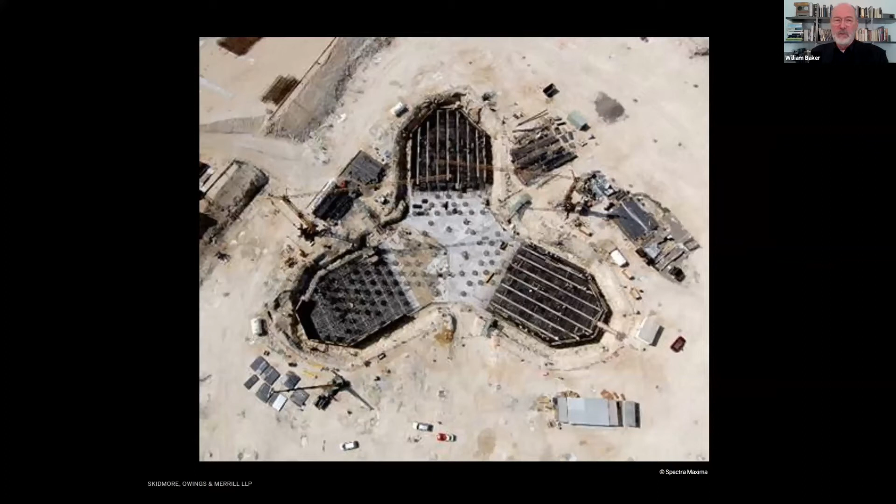So you gotta take that on head on. We poured the foundations in these 4 segments. There's the rebar cage, there's the concrete of the mat. And then it sat there for a while.

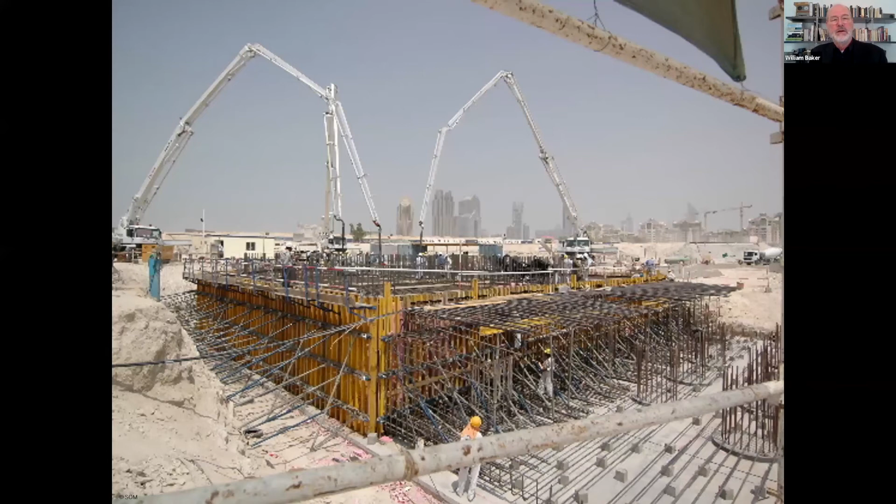For those of you who know Dubai, the neighborhood's changed a little bit, okay? Look at that, it's all desert, okay? You go there now, you recognize some of the buildings up the coast, but anyway.

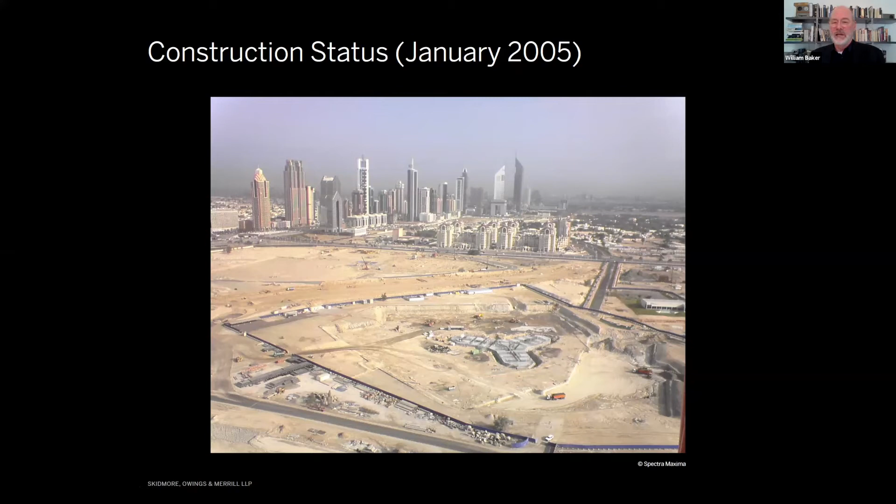So it sat there. The foundations were done ahead of time by another construction team, and then it sat there while Emaar and Mohammed Alabbar negotiated with, I think we had 7 bidders for it, because we used very conventional construction technology. And this was on purpose. We knew we were going to do the world's tallest building, and we needed to do it with structural systems that were familiar to contractors. So we had 7 valid proposals, tenders for the project.

Anyway, eventually a team was selected. First thing they did is they tried to figure out how are you going to pump concrete 600 meters in the air. I was thinking, how are you going to do that? You're going to go to a mountain or something? No, what they did is they used hydraulics, Hardy Cross, and they figured out how many bends and how much going back and forth across the desert floor will you get a pressure loss equal to pumping vertically 600 meters. They tried various concrete mixes and looked to see what came out the other end was still concrete or not. Eventually they came up with a concrete mix so they could pump 600 meters.

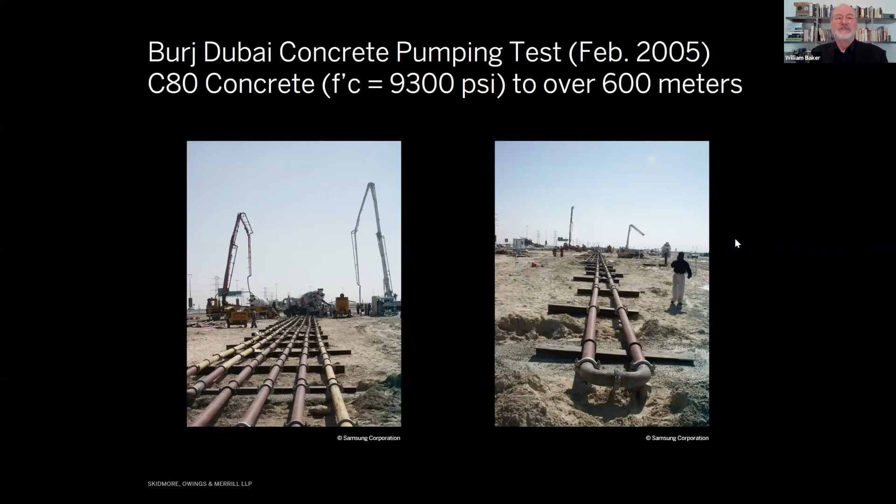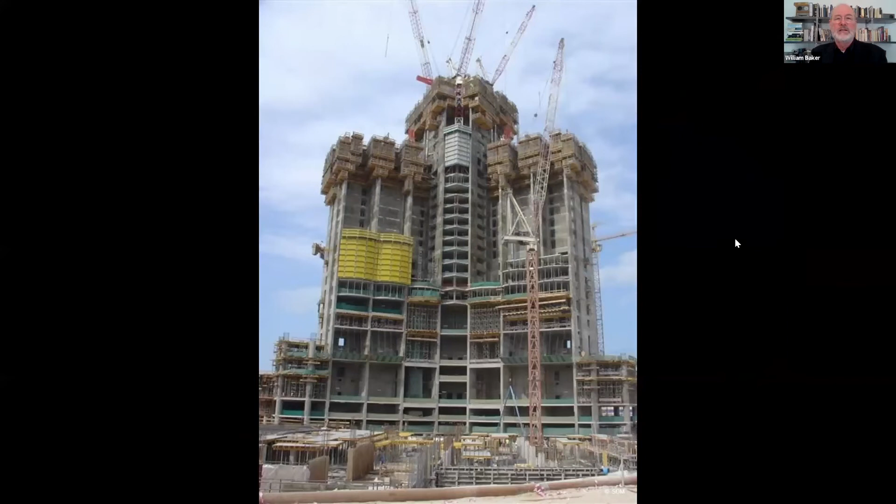So here's what it looked like when Samsung, Arabtec, and BESIX showed up on the site in 2005. And then it goes off to the races. It's like a vertical factory. The formwork raises itself, the concrete is pumped. The only thing that has to come up on the hook for the structure is the rebar cage. The walls and the slabs can be raised independently. That's very important for speed. And the wings, the tips with the columns, were left behind because they took too long.

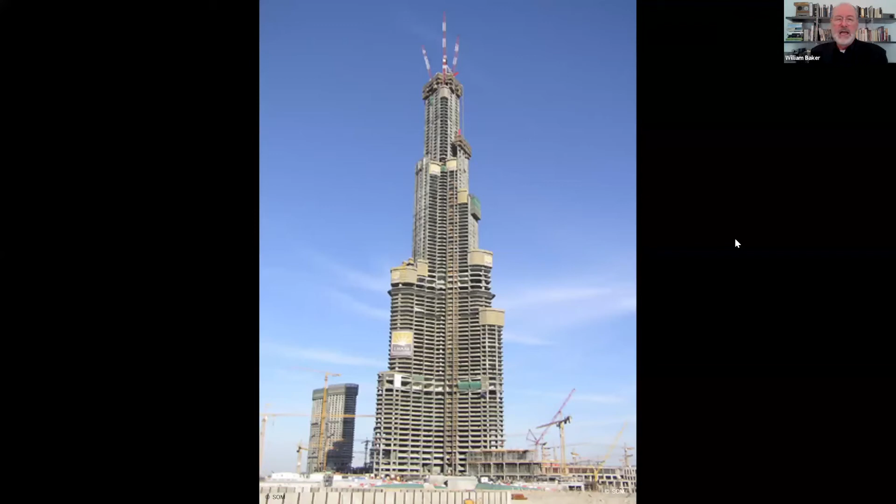And it went up. The original cladding supplier went bankrupt, a Swiss group. And then later they brought in a group from Far East Aluminum to do the skin. And it went up and up.

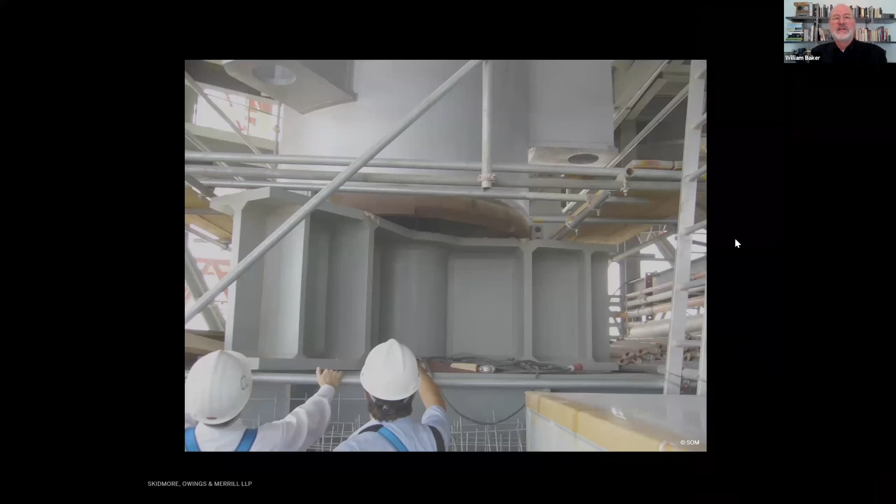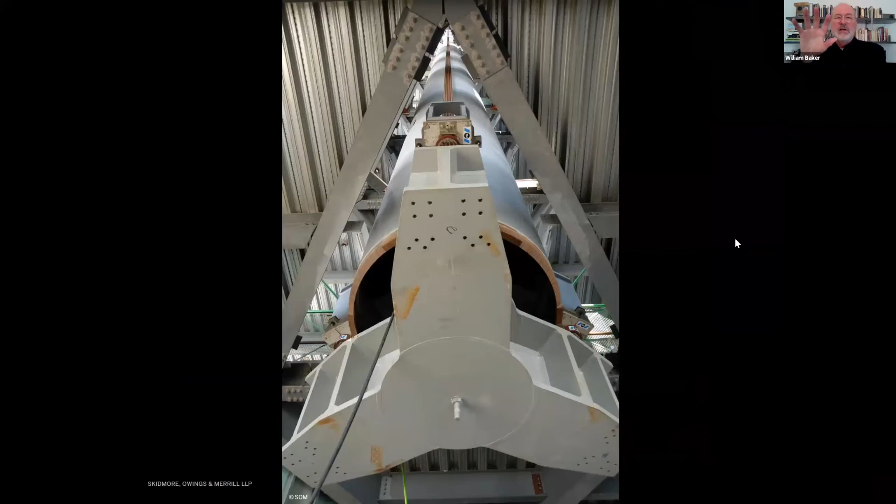We couldn't get a crane high enough to build the spire from the outside, so it was built on the inside of the building. This is the bottom of it. We had this kind of like, I call it a lazy Susan, at the bottom, where it was a triangular opening going up to the tower. And then this base, you get to the place and you rotate it 60 degrees and set it back down.

Anyway, so here it is hanging on strand jack down into the building, and it was launched out the top. We even put blades on the top of the spire. If you look close, you'll see these blades. That's to break up the vortex shedding on the spire itself. Of course, there's a light up there. I understand Tom Cruise changes the light for them. I'm not sure about that. That's a joke, okay.

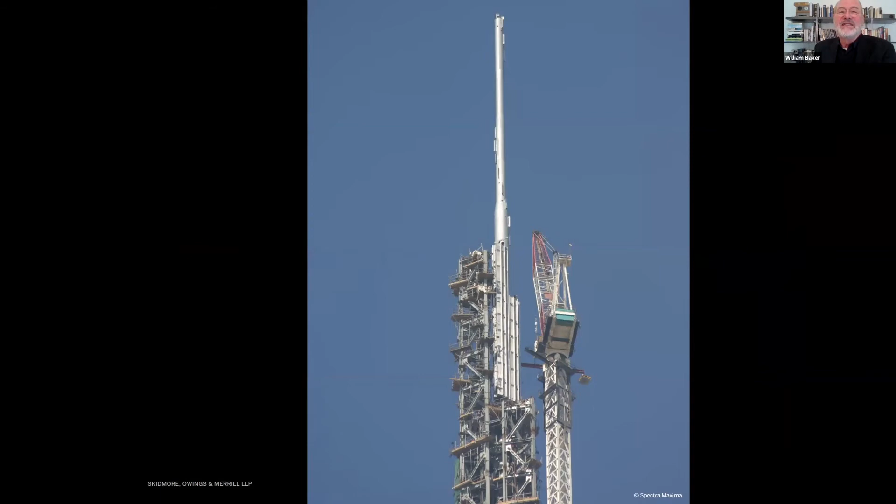Anyway, so there you can see the very top. It is the lightning rod for your entire city. I'm sure you've all seen it hit by lightning. Of course, it's completely grounded. It's a giant Faraday cage from your physics or electrical engineering class. So lightning can never get into the building because it's a Faraday cage, and it's grounded, so it does no damage.

There was finished before they washed it. You're certainly above the clouds occasionally. And then they washed it and it looked beautiful. Just amazing. And all that brightness you see is light not going into the building.

Of course, you get to see it. I don't get to see it. I haven't seen it since a couple of months before the pandemic, so I haven't seen it in almost a year, not quite a year and a quarter or something.

It's incredible the way it catches the light.

Then we had the grand opening, not quite 11 years ago. It was Independence Day, January 4th, 2010, the grand opening. They announced the height was a big secret, and they changed the name from Burj Dubai to Burj Khalifa, which was a big secret. No one knew the name had changed, or the actual height, until boom. So this is the instant it was announced. They had the fireworks, just totally amazing. It was a nice event.

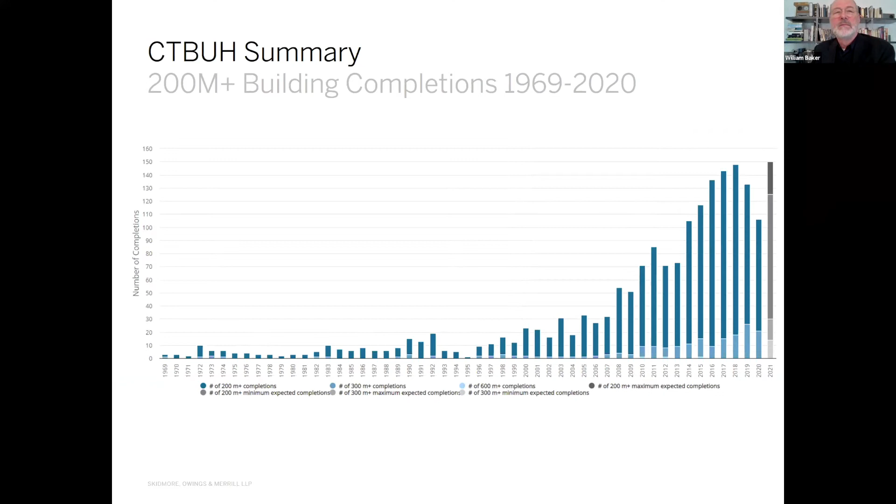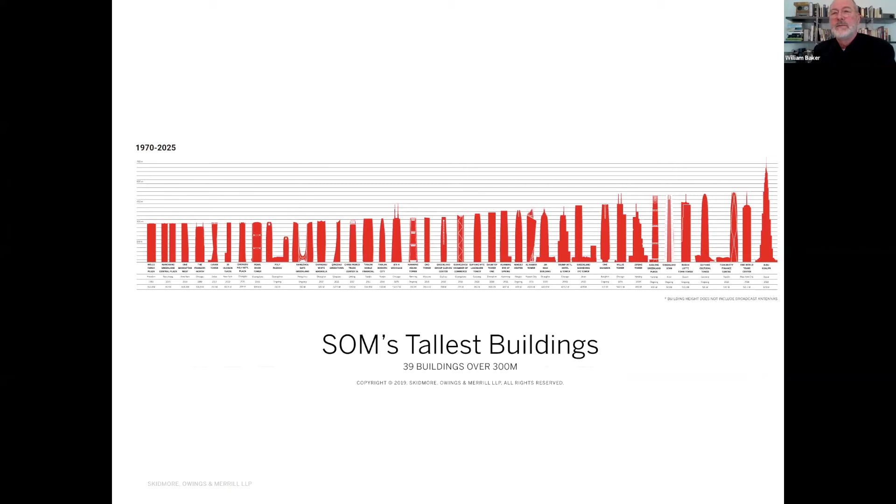I'm running out of time, but let me say briefly why super tall. Dubai is the reason, and we are in this era of super tall. These are the buildings taller than 200 meters from the last century, this century, last century, this century, we're in the era of the tall building. Every year there's some very tall buildings built. These are buildings my firm has done that we think will be completed in the next few years, all over 300 meters tall.

I feel a little embarrassed talking about this to this crowd, but the Burj effect is a big deal around the world. There's that desert. This was my last time in Dubai, November 2019 I guess. I haven't traveled for a year now. I took these photographs as the sun went down. I did a little thing with Richard Hammond from Top Gear, where we rode dune buggies across the desert and tried to explain why that matters. Then the shows, the people, the crowds, the fountains, the music, the light shows, just totally amazing. When you think about what this building has done for Dubai, the UAE, and for the world, it's just quite amazing. So, thank you.